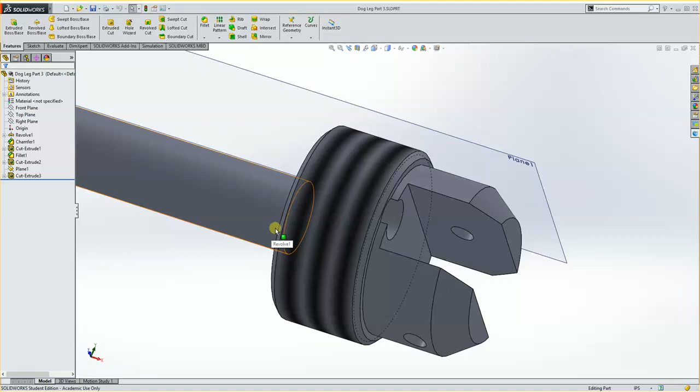Alright, so in order to get the configurations that we need, we're going to have to do a little modifying. Initially what I'm going to do is go over to my configuration manager, and you'll see I have a default and I have a turned part.

The default is the finished part here, so what I'm going to do is rename that to say it's finished part. I'll right click it and say properties, and I'm going to call this one finished part, and hit OK. The turned part here, actually I want to get rid of.

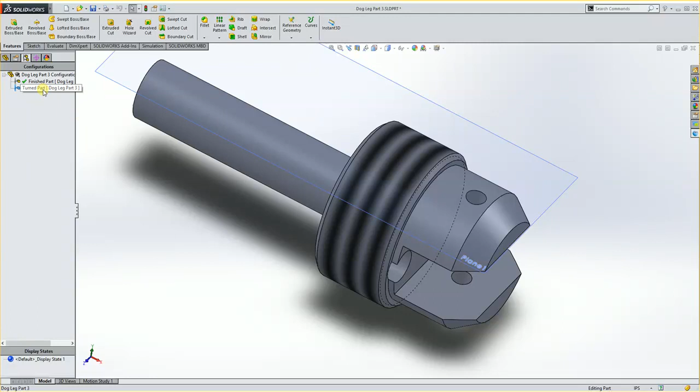I'll double click it so you can see, but it was an idea of what could be turned before doing the fourth axis, but the problem was it wasn't rigid enough for that. So we're going to do it a different way.

So I'm going to take this configuration and delete it. I need to make the other configuration active. Then I can right click on the turned part and say delete, and say yes.

Now if I go back here, you'll see it's got everything active. I go to configuration, it's just got the 1. Now I'm going to go up to Dog Leg Part 3, right click and say add configuration. The first one I'm going to make here is going to be called first turn, and I'll hit OK.

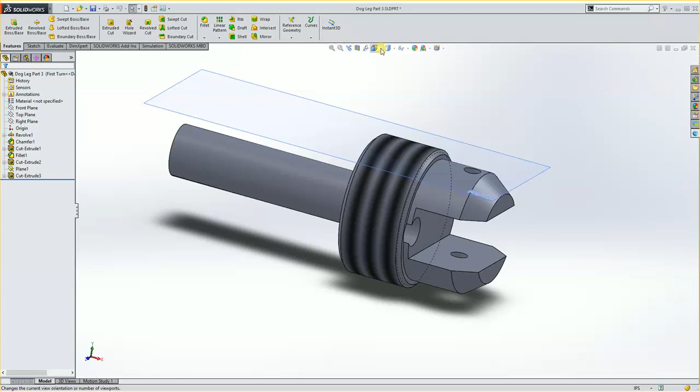Now what we'll do with this is we'll make a rough type shape that'll be turned before we put it in the fourth axis. So I'm going to go back over to the feature manager, and I want to look at my part in the front plane. This way I can create all the geometry I need based off of the outline of this, or the silhouette.

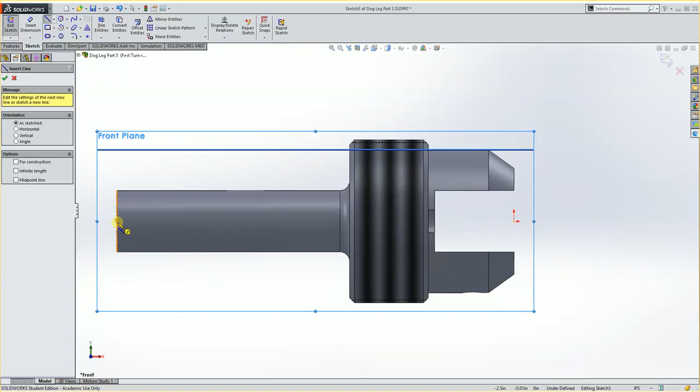I want to do this on my front plane, so I'm going to activate front plane and tell it to sketch some lines. I'm going to start out at the midpoint of this back edge, and bring it up approximately half of 0.875, but you'll see I'm at 410, it's fine, I just want it to be vertical. I'm going to bring this over until I reach the coinciding of this edge.

I'm going to click, move up just somewhere over the part, click, and come over to this edge. Now I want to get it vertical with this, so I'm going to come to here, and follow the dotted line up till I'm horizontal. Click. Then I'm going to come down a ways here. Now I can come all the way down to here and make it coincide with this, but I really want it to be up a little above this.

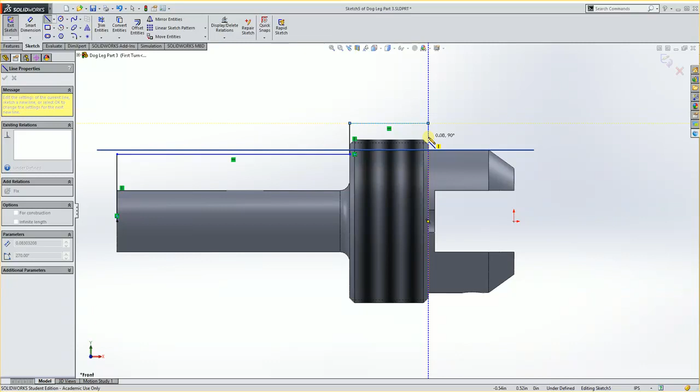And I'm going to click. Then I'm going to move over till I'm vertical to my origin. Click. Bring it down to my origin. Click. And then back to the beginning. Now I have a full shape.

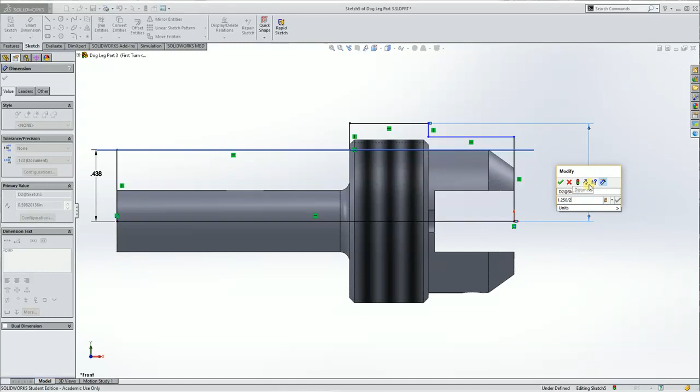Now I need to start smart dimensioning that. I'm going to smart dimension it. I want this end diameter to be 0.875 divided by 2 — as you see, I'm dimensioning the radius. Then I'm going to go from this top edge to my axis, and make that 1.250 divided by 2. And this first one here is going to be 1 inch divided by 2, or 0.5.

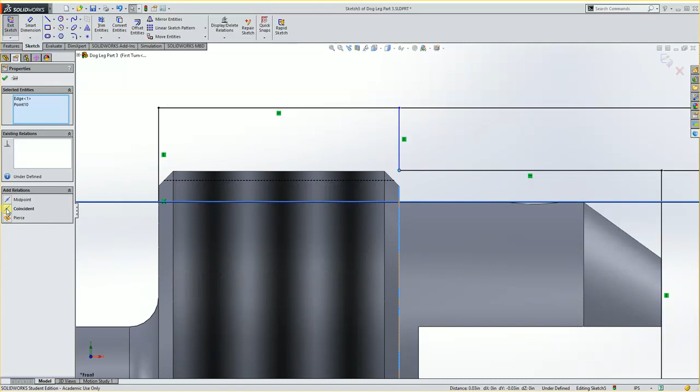Now you'll see this line isn't quite fully defined, and that's because it was never really snapped to this or anything like that. So I'm going to hit OK, choose this endpoint, then shift and click this vertical edge, and make those coincide. Hit OK. Now you'll see I have a fully defined sketch.

I'm going to go into Feature, and do a Revolve Boss Base. I'll choose my axis, the center line, and hit OK. Now what I have is a fully defined part — a sketch of what would be my final shape right before I get to the fourth axis. Alright, so I have that one there.

I'm now going to save this, and I'll save after each one of these just in case anything goes wrong. Going back to the configuration manager, I'm going to utilize this as my next starting point.

So I'm going to go up to my Dog Leg Part 3 configuration and say add configuration. This one will be called fourth, and I'll hit OK. Now I need to make some changes to this.

I need a hole through it, and I need this end cutout. This end cutout can be done with a pre-existing sketch, and so can this hole. So I'm going to go in here to my feature manager.

I can create a new sketch on an end point of this or something like that, or on a plane. I'm going to do this one on this face, click on Sketch, choose the sketch icon. Now it wants me to create a sketch here. I can make a new one, but I can also go into the actual sketch where this was made. I believe it was here, so under Cut Extrude 1, I can click Sketch 2, and you'll see that it highlights that, and I'm going to hit OK.

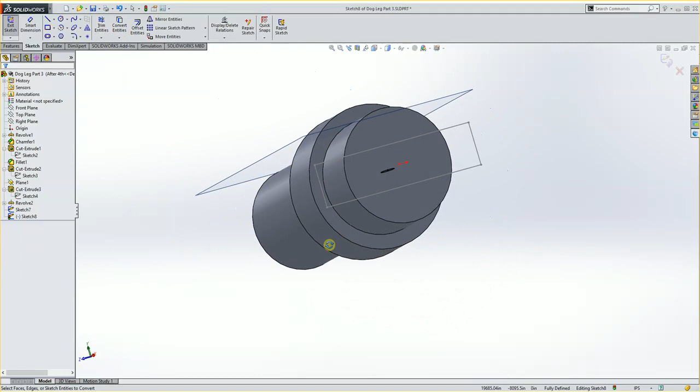And then this time I'm going to come find this cut. It looks like it is under Cut Extrude 3, it's Sketch 4. I'm going to Convert Entities, and you'll see it put it in the middle there, and I'll hit OK. Now I have the two sketches I need to create this part.

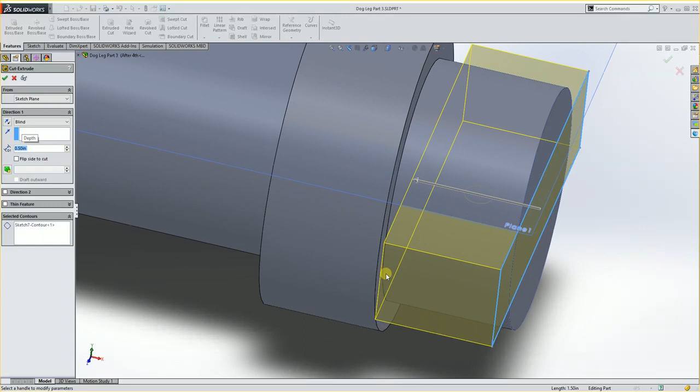When I go to Features, I can choose this sketch, just choose part of it, and I can do an extruded cut, and I'm going to cut into this part 0.450, and actually I think it is 0.5. Now it doesn't go all the way down - you'll see it's a little above, but that's actually where we want it. 0.5 deep, and I'm going to hit OK. So that's the slot that we're going to put through it, or slit.

And now I'm going to use this sketch to do the cut up and down. Now, I can do this as a feature if I want, as a Hole Wizard, but it's actually a lot easier to do it, in this case, with this circle. So I'm going to go in here and do an extruded cut. It's asking me for it.

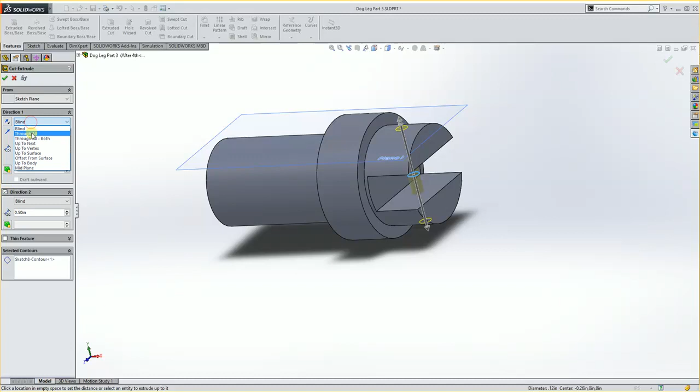I'm going to pick this circle. It's only going one direction. I want it to go two directions, and on both of them, I want it to go through all. And then you'll see that that's going through the entire part. I'll hit OK. Now I have that configuration done.

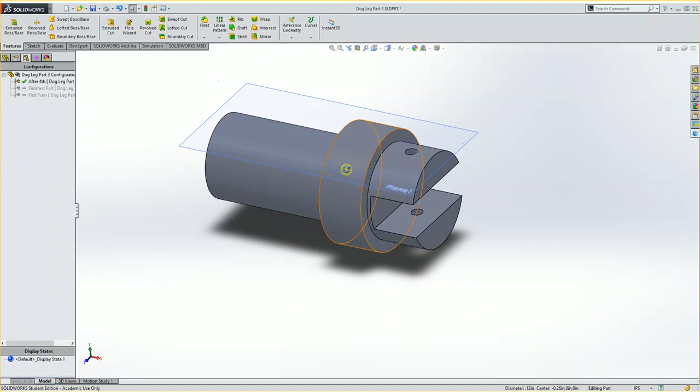Alright, so now what I would need to do is make another configuration with this turned down. Now some of these configurations you don't really need - it's just that it's a lot easier to use it as stock, and when you're learning, it makes it a lot easier to see what's actually happening. So don't get too frustrated and say, well, why can't I just turn this or machine this without all these configurations? Well, you can. This just makes it easier for seeing what's going on.

Alright, so I'm going to make another sketch, and this sketch is going to be on here. But before I do this, I want to actually make a new configuration. So I'm going to go to Dog Leg Part 3, right-click, Add Configuration, and I'll call this one 0.375 shank. I'll hit OK. Now I'm going to make the new sketch.

I'm going to pick here. I'm going to tell it to create a circle from this origin. I'm going to just come out a little ways and hit OK. And I'm going to tell it to smart dimension this to be 0.375.

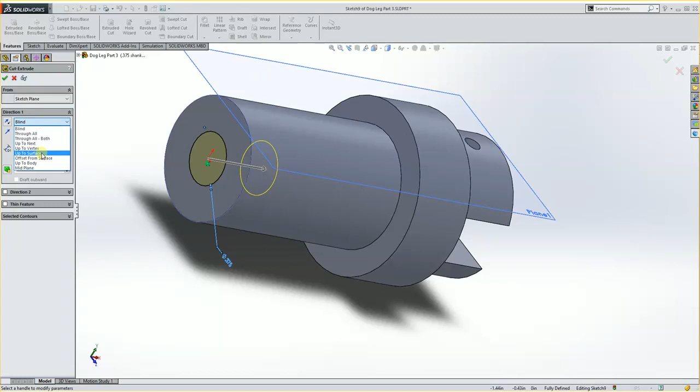Alright, now I'm going to cut this up to this face. I'm going to come in here with a new feature, then do an extruded cut. For the direction, I want to go up to a surface, and I can pick this surface right here, this face. Now it's going to try to cut a hole in there, and that's not what I want, so I need to check this box that says flip side to cut. Then I'll hit OK.

And that removes that, so that would be my next spot when I get this in the lathe and turn that back.

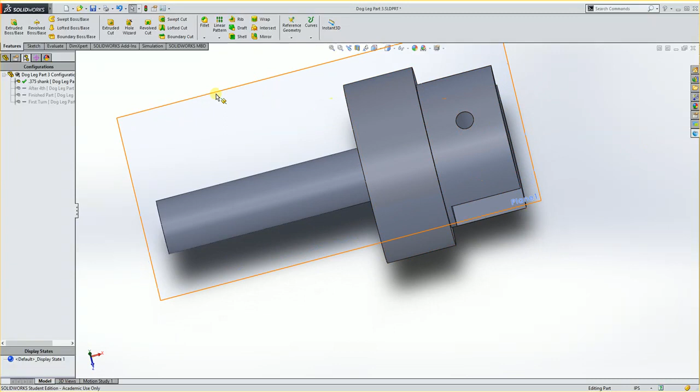Alright, the last configuration I'm going to make would be the finished part. I actually don't need to make any more, I can just use these four. The last one will be the finished part, that'll be this here. So I have everything I need, I have all the configurations I need, so I want to save it again.

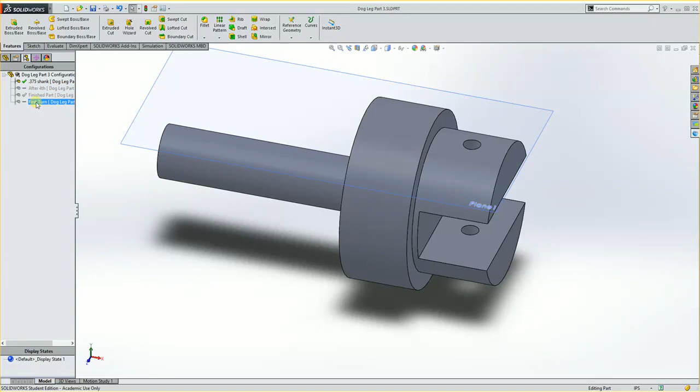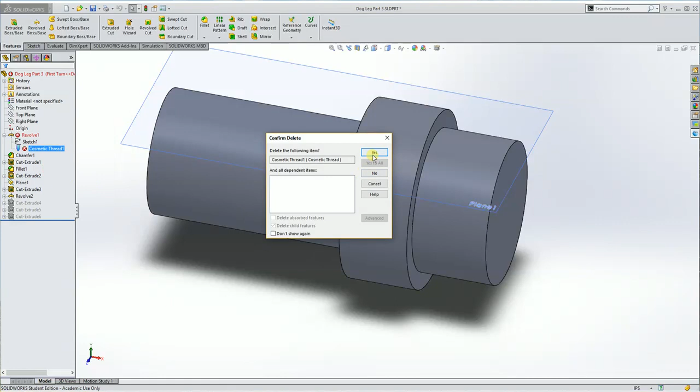Now for programming this part, I'm going to start off with my first turn configuration. And I see I get an error here, it's a cosmetic thread, I'm going to hit OK. And if I go over to my features manager, you'll see it's giving me an error up here, but that's because that top revolved feature had a cosmetic thread on it just to show it. What I can do is just delete that. I don't actually need the cosmetic thread for any reason other than looks. We can show you how to cut a V-groove through this later on as well.

So I have the part I want, I'm going to save it again. And now what I can do is bring this into DFS, or Delcam for SolidWorks, and do the programming. So I'm going to click on Delcam for SolidWorks.

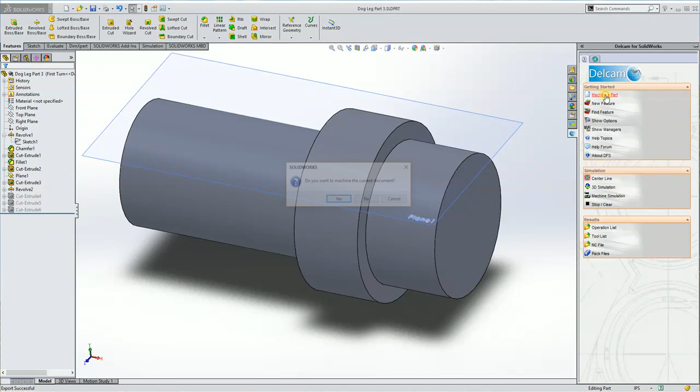I'm going to say machine a part. Yes, the current part. I'm going to do MC inch turn. Oh, open, and it brings it in. And you'll see my axis is wrong, but it's again a simple fix, you just need to make sure that your axis is along the part.

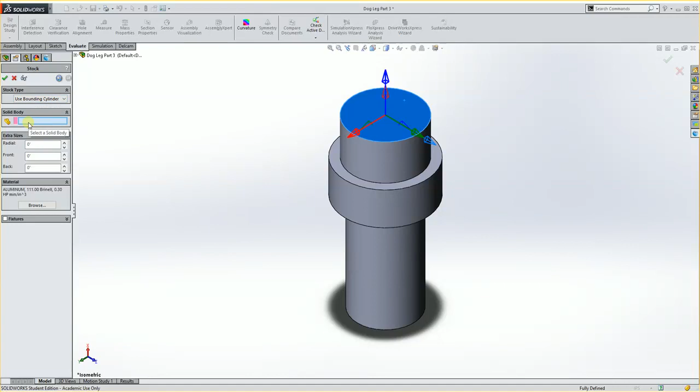So when it's in the stock axis, I just choose the face of where I want it to turn, so I'm going to pick this face. You'll see it's now aligned. I'll say next, it's asking what I want to use, I'm going to use a bounding cylinder. My stock body, I just choose anywhere on it. For the back, I'm going to say I want 1.5 inches of extra material back here.

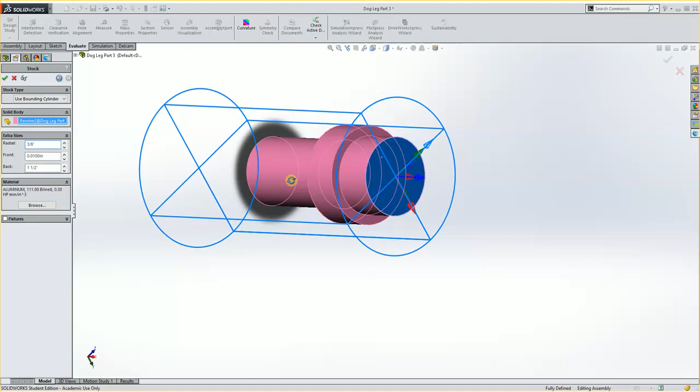I get this more like it would look in the lathe. For the front, I'm going to say maybe I have 10 thousandths in the front. And radially, I'm going to have an inch and 5/8 stock. So I want to figure out what the difference is between 1.625 minus 1.25, so I can just type those in and it'll give me the number 3/8. But you'll see that's too much, because I actually need to take 3/8 divided by 2, and that gives me the actual size of the stock I'll be putting in there.

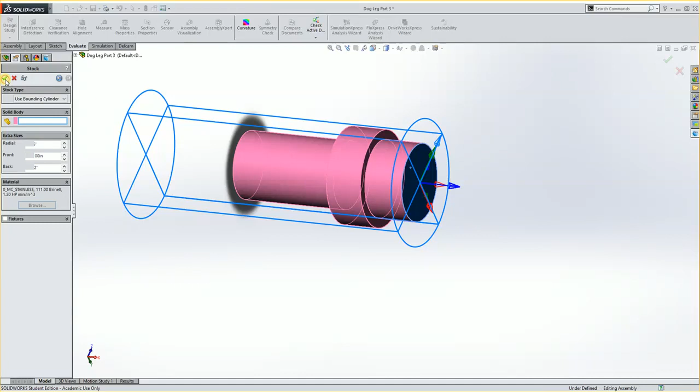My material, if I browse in here, is going to be stainless. I'll hit OK. So I have my sizes right, my material, and I'll accept that. My location is correct because we aligned it originally with the stock axis, so I can just accept this.

And now it's ready to program. Now I need to face the end off, do the rough turn, and then I'm going to back groove this because the turning tool can't get down in here. We'll let the turning tool come down in a little ways and get some of the material out so it doesn't have to groove out as much, but it won't get all the way down in there.

So to start off with, I'm going to go over to the DFS feature tab right here so I can see my part, and then go to the Delcam tab up here so I'm in all the Delcam information. I'm going to do a new feature, and I'm going to do a face. Now hit OK. My location is going to be the end of the part here. Thickness will be the outside of the stock, so in thickness I pick this face of the stock. And then for outer diameter, I pick the outside diameter of my stock. That's to make sure that it comes all the way up to the top of the part here.

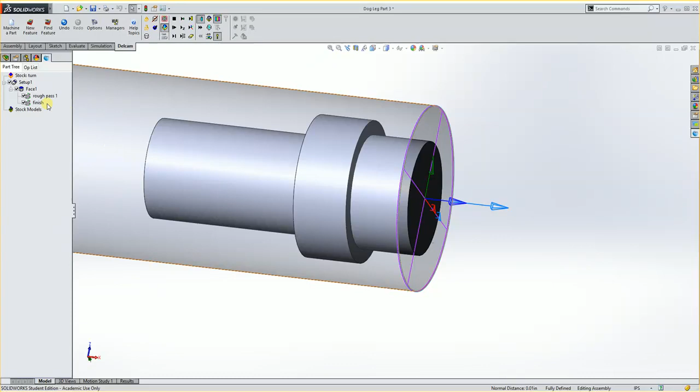I'll hit OK, and it will make a toolpath for me. If I simulate it here, I'm going to turn on my tool and simulate it single step. You'll see the tool coming in now. Of course, in the machine it would look more like this - it faces it off, comes out, moves back.

It's using an 80-degree diamond, which is okay. You could change it to 55, but the 80 should be fine.

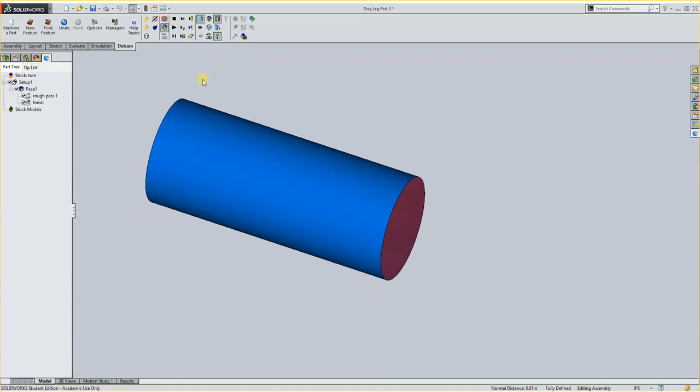The feeds and speeds are for the stainless. If I were to go into this and look under my results tab, you'll see it's using 275 surface feed and 300 for finishing. It's giving me 8 thousandths chip load for roughing and 3 thousandths chip load for finishing.

Alright, so now I want to do the turn on the outside. I'm going to do a new feature. I'm going to do a turn bore.

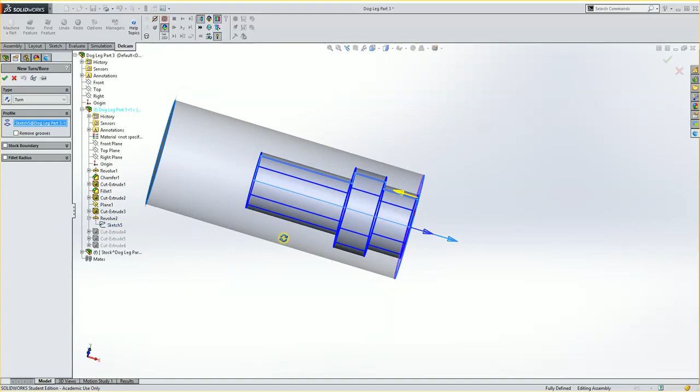My profile I can't really see here, so I'm going to have to get it through my drop downs. I come down here, I see dog leg, click here, I go all the way down, and I'm going to find this revolved here, it's the revolve 2. I open that up and I click sketch 5, and you'll see it gives me all the information I need for turning that. I'll hit OK.

Now what it does is it tries to rough and finish it. If I step this through, you'll see it face it off, it'll come up, and it will rough across, rough a few times.

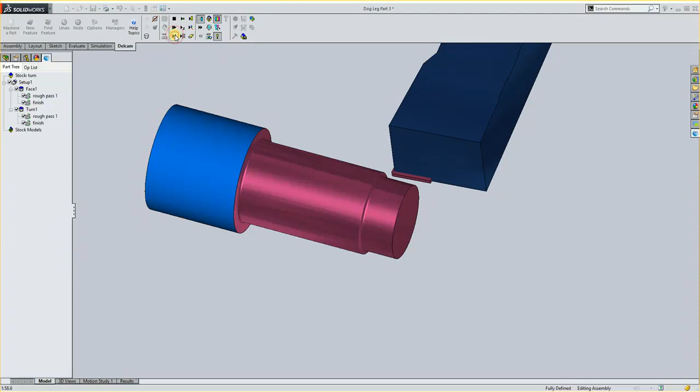Now I can do the front. And then it tries to come in and do a little more in the back, which is fine - get some material out of there. And then it'll come to the front again and do a little bit more roughing on it, and finishes it off. So this is what it looks like so far.

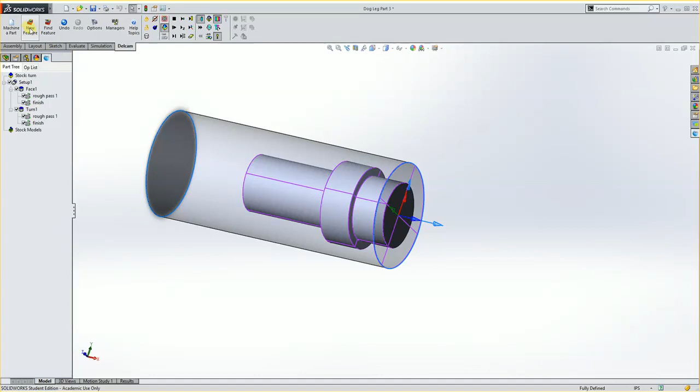Let's stop that. Now I'm going to back groove it here. So I'm going to come in here and say new feature, and I can say that I want to do a groove. I could do this a couple different ways - I could create some geometry to do the groove, or I could try to do the groove this way.

I think really the easiest way to do this would be to make some geometry for this. So I'm going to cancel out of this, and make a new sketch that can come out a little bit further and come up and just really follow this shape. I'm going to look at this in my front plane. Don't worry that it tipped up like this, it's not a big deal - I just need to be able to get some edges to work off of.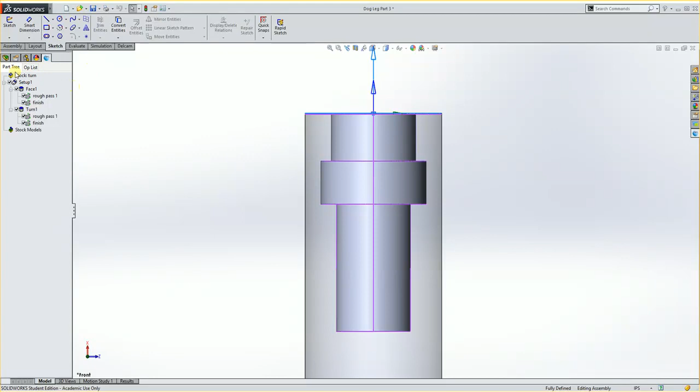So I'm going to go in here and say I want to make a sketch, and I need to tell it a plane to draw on. I need to go back over to my tree here, and tell it the plane I want to be on. It looks to me like it's going to be the front plane, or top plane. So I'm going to click top plane.

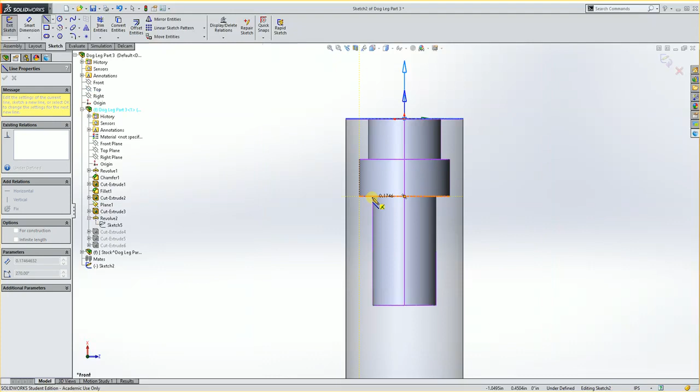I'm going to create a line, and what I'm doing here is coming to this point - I want to make sure I'm getting the end point. I'm going to come down to this point, and then come over somewhere off my part. I don't want to come off too far, but a little ways. Click, move back up until I get the dotted line, and click there. Now I'm going to accept that sketch.

Now I have a sketch to work with here for my back groove. I'll go back over to my Delcam tab, and say new feature, groove, and hit OK. It asks me - I can put in actual information, or in my case I'm going to say from curve. And the curve I want to pick is this one.

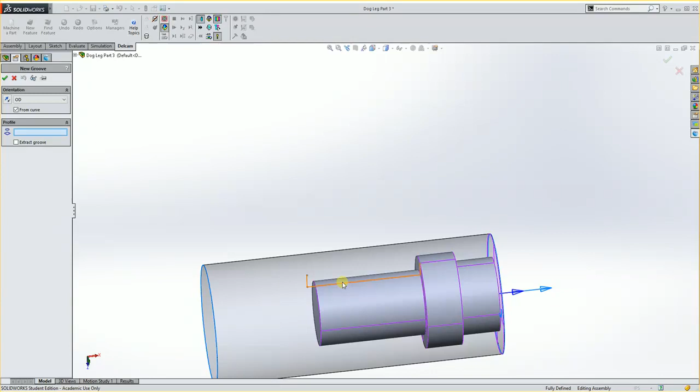So what I can do here is have this groove this back. Now I might run into a little bit of a problem where my roughing tool didn't come off far enough, so I might want to edit that sketch and have it come back a little further. We'll get to that in a little bit.

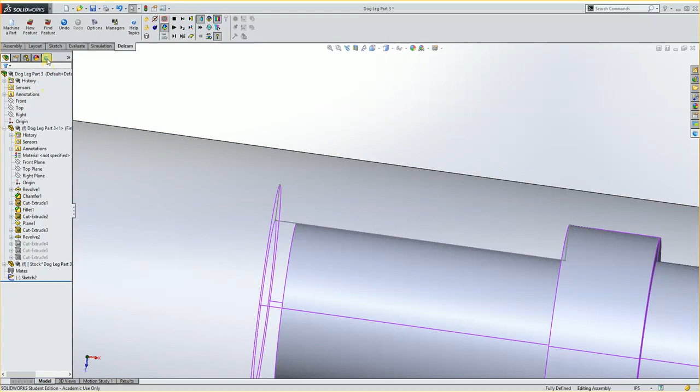I'll hit OK, and if I go to my DFS feature tab here, I'll look at it. Looks like it did OK, but I almost guarantee it's going to crash here. When I play this, it comes in, and actually it does crash. I can see it a little bit different here, but I will play the first step, play the second one, and now I'm going to come in here with single step finish tool.

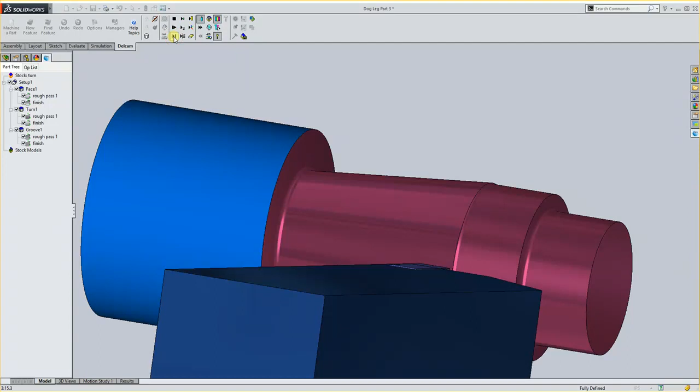It finishes to there, and then my grooving is going to come in. I'll rotate this up a little so you can see it.

It's kind of coming in here and cutting this out. I think it's just clipping it a little bit, but I think it'll be okay for what we're doing. Let's just check it one more time. I don't want to break any tools.

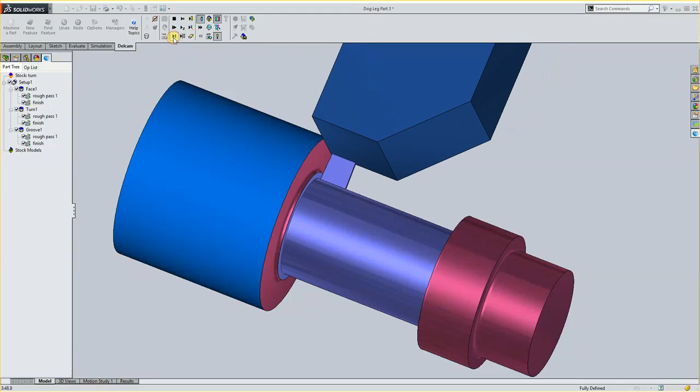It's not too bad, but right here it's going to bump it. See how it hits right there? And it comes down. So that's bad.

So we're going to go in and I'm going to edit a sketch. If I go over to my feature manager here, I can find that sketch for that outer turn. It's Revolve 2. And the Revolve 2 sketch right here, I can have it come out a little bit further, so the part will look a little bit different.

I'm not sure if I want to mess with that sketch, so I think I want to copy that sketch onto a different plane. If I go into sketch, I'm going to tell it what plane I want to be in here. Top plane - let's look at it again, that sketch. I want to be in the front plane, so I'm going to go to front plane.

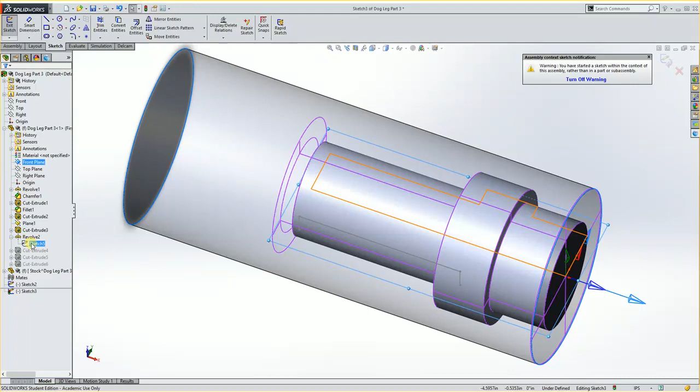I'm going to say sketch, choose sketch 5, and say convert entities, and that gives me that again. I'll hit OK on that. I'll go back into that and edit it.

I don't need this line here. I don't need this one. I really don't even need that front one. And I'm going to get rid of this relationship here, and I'll probably have to get rid of all of them so that this turns blue.

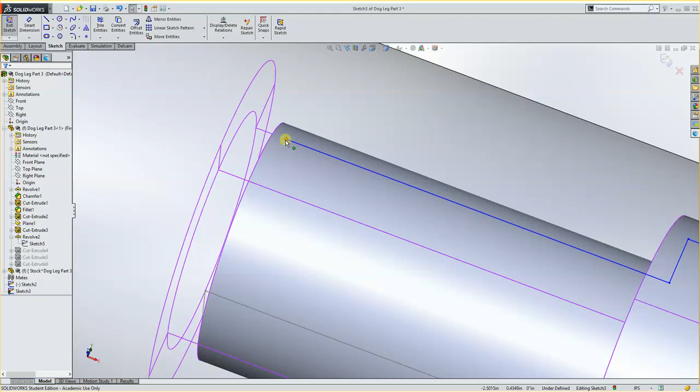And now if I take this point, I can drag it back a little ways so that it will go past the part. Now I don't need to go too far, I'll bring it back a little here. And you'll see how that now comes out like that off the end of the part. I'll hit OK.

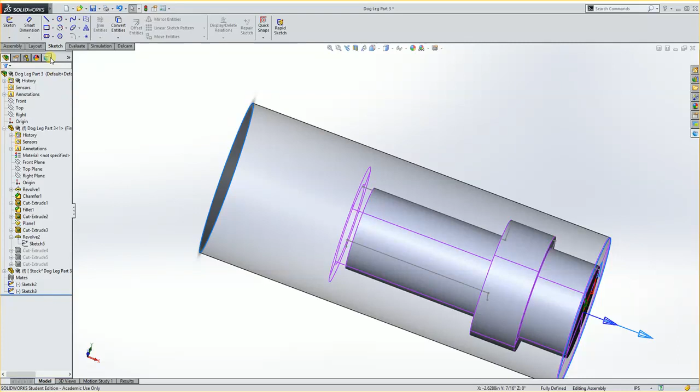And of course that sketch isn't really related to my initial revolve. So what I would do then is go back into the Delcam features and edit this turn. If I click turn, the pop-up menu will come up and I'll say edit. And instead of using sketch 5, I'm going to grab this new one. Then you'll see it will come out a little bit further. And I'll hit OK.

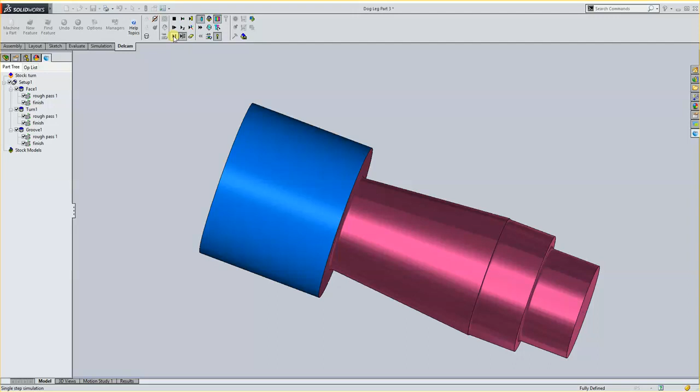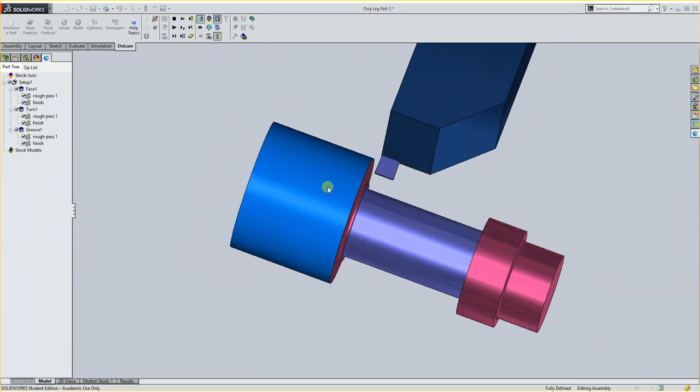Now when I do my simulation, it'll face it, it'll rough it, it'll finish it, and then my grooving tool won't collide with anything. It comes over, no problem, comes in to finish it, comes on the other side to finish it, comes across and up, and we're golden, everything's great.

Now it is coming in and grooving it off with a 1/4 inch tool, and we want our grooving tool to be the 165 that we actually have. So I'm going to go into the rough pass of Groove 1, double click it, and change my tool. Now really what I'm going to want to do is make sure I'm in the right library for this. So under Managers, I want to make sure my tool crib is set to Tools Inch, and I'll hit OK.

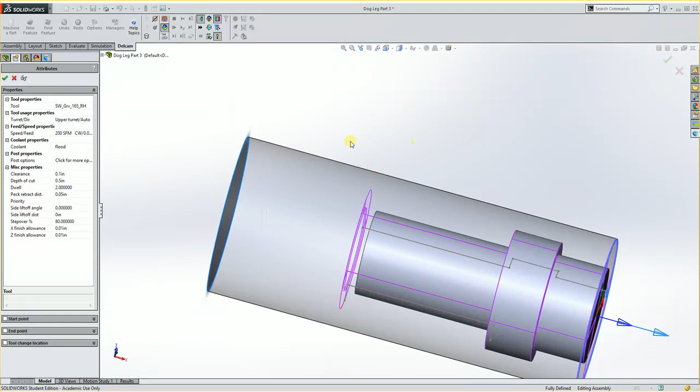Now when I double click on Rough Pass 1, I will double click Tool, and I can find a 165 groove tool. And I'll hit OK. And OK. And that will automatically update the finish tool as well.

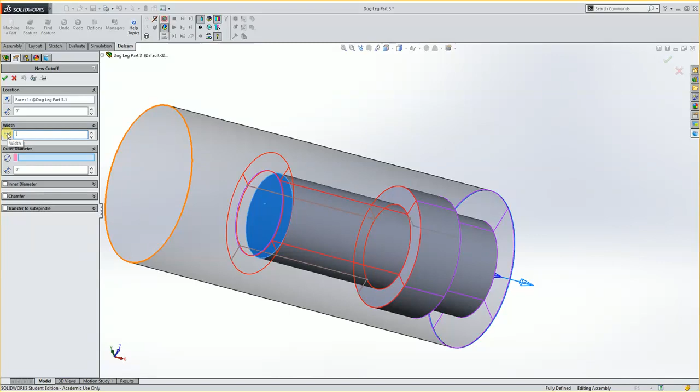Now the last step we need to take on this portion is we need to cut it off. So I'm going to do a new feature, cut off. I'm going to hit OK. My location is the end of my part, so I pick here. My width is going to be 0.165 because that's approximately the tool's width. And my outer diameter is here. You'll see that it'll put in the cutoff from up top there.

And I'll hit OK. Now the cutoff will be the 165 tool because we told it that. And now when I play everything, it'll come through, groove it, and cut it off. So this is what it will look like after the first step.